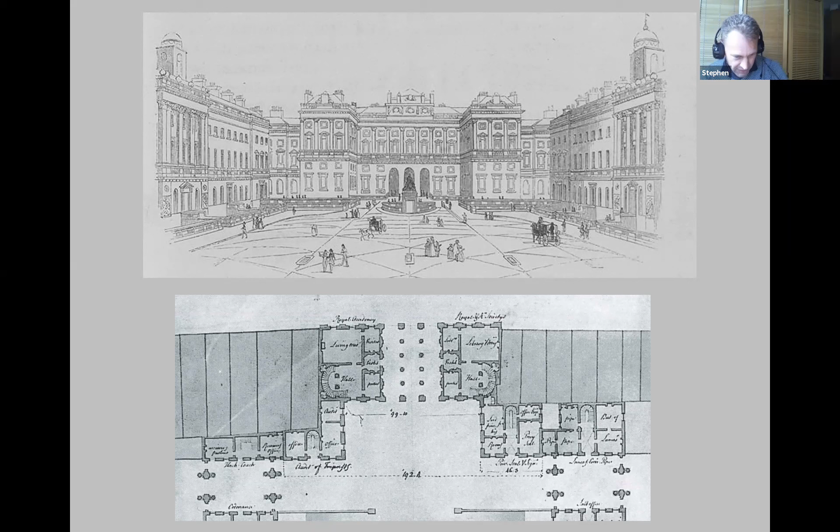The Strand block was designed to house nine institutions, but it was also designed to separate them. So perhaps it would be more accurate to say it took the form of an assemblage of disconnected suites of rooms.

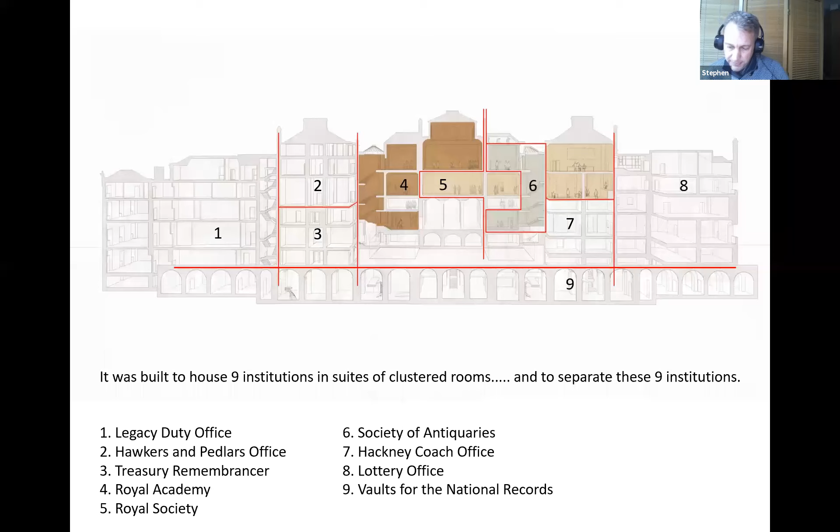The Courtauld is a unique institution, half academic teaching in art history and conservation of artwork, and half art gallery. It moved into the Strand block after refurbishing it in 1989. You can see how the Courtauld appropriated Chambers' divided palace to house a largely divided set of departments. The poor linkages, contorted corridors, and almost 50 changes in level that existed between the old suites of rooms meant the visitors' and students' experiences were often confused and disjointed.

At its simplest, our project has focused on creating a circuit for shared exchanges, linking together the suites of rooms so that all of the activities and the collections at the Courtauld can be encountered by students, staff, and visitors. This approach tunes the rooms for the current activities they accommodate, but it also leaves them open to be reused for different activities in the future.

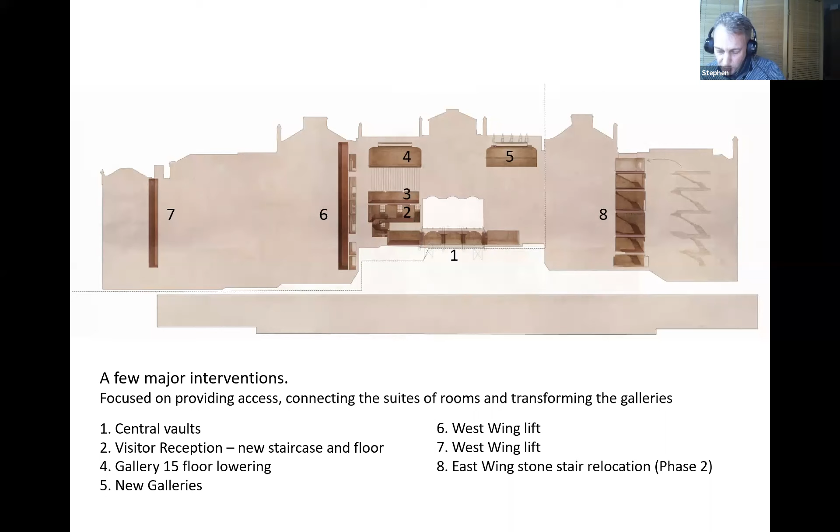Bridging, tunneling, connecting, and new lifts as well require making a few major interventions, but thousands of small adjustments. Everything is an intervention and everything is a one-off because the building is complex. It's riddled with inconsistencies following piecemeal adjustments over the last 240 years.

The material we're working with remained concealed for much of the project. Our work has previously been described as gentle surgery, but this requires the deployment of the full range of interventions in the body: open heart surgery, keyhole surgery, and acupuncture, as you'll see.

So what follows is the archaeology of a construction project. The various finds could quite possibly be reclassified and reordered. I noticed they don't match any of the craft disciplines defined on the London Craft Week website, but I hope you will feel how craft emerges from the conditions encountered and recorded below.

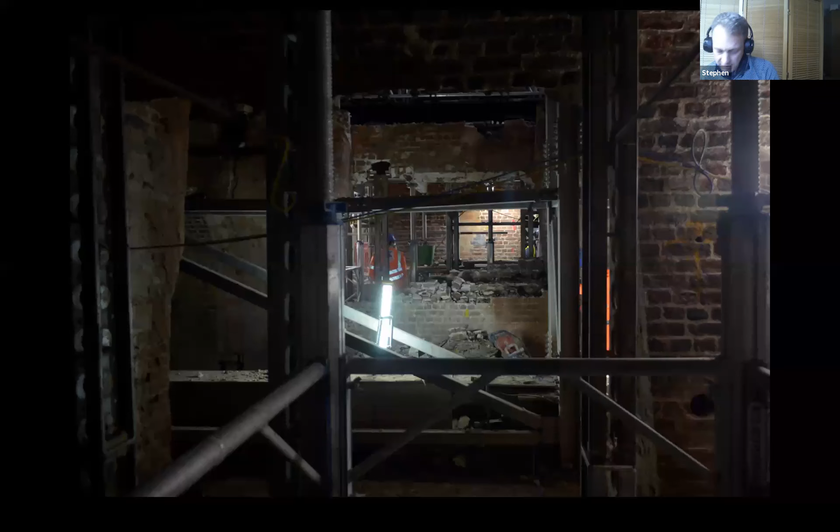The emergence of the openings, connecting through those, starting to link the east and west sides of the building. And you get a sense of the extraordinary scale of intervention in order to remove some of the heaviest and thickest parts of the fabric to create that tunnel below the vestibule.

You can just see the score marks on the brick where they used a diamond tipped cheese wire to cut out some of the thickest areas of brickwork.

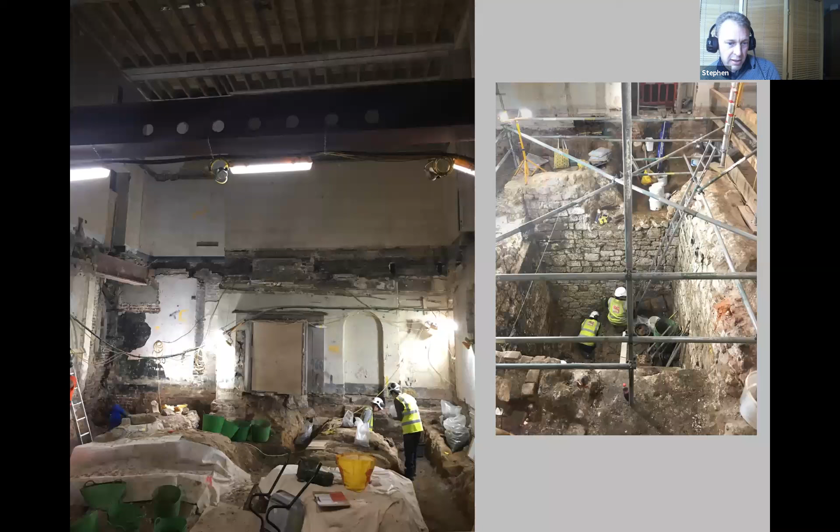We also had to lower important floor areas in order to get level access through some of those lower levels. And you can see on the right the kind of things you'd never know were going to appear - that's a medieval latrine which emerged partway through the construction, of which the archaeologists did their work and recorded their finds.

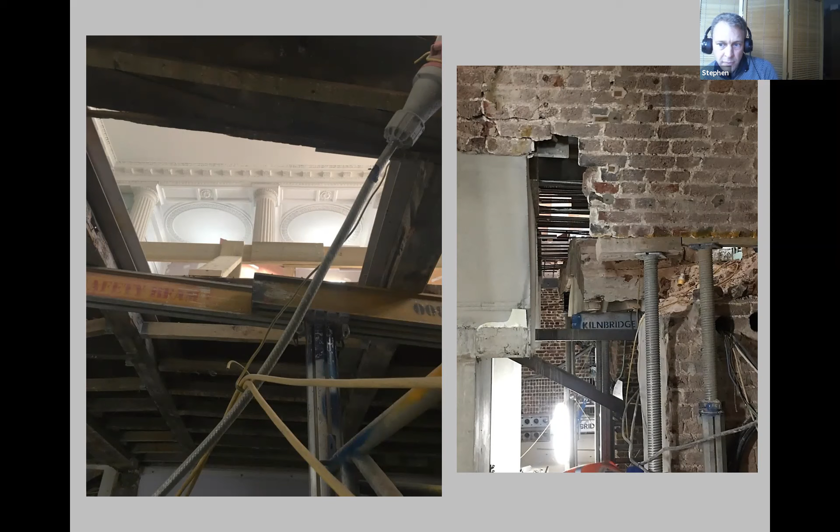On the left, you can see when we took out the central section of the vault in the vestibule. We also had to construct a temporary road bridge so that vehicles could get into and out of the Somerset House courtyard to keep servicing events. So all of those movements, the vehicles were going on while the workmen were underneath, continuing to excavate.

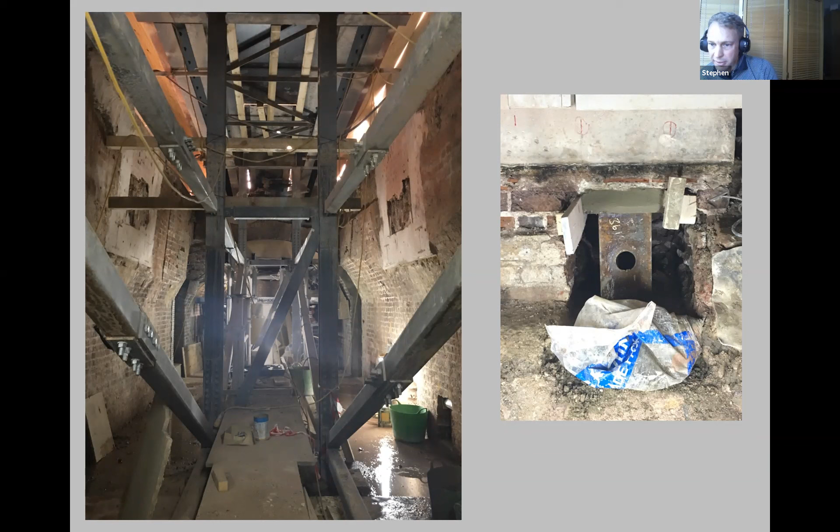You can see here the existing brick vaults to the east and west of that central vault were retained and trimmed back, and then we cast the new central vault in concrete, which we'll look at later, into that existing brickwork. And these are the props holding that brickwork up.

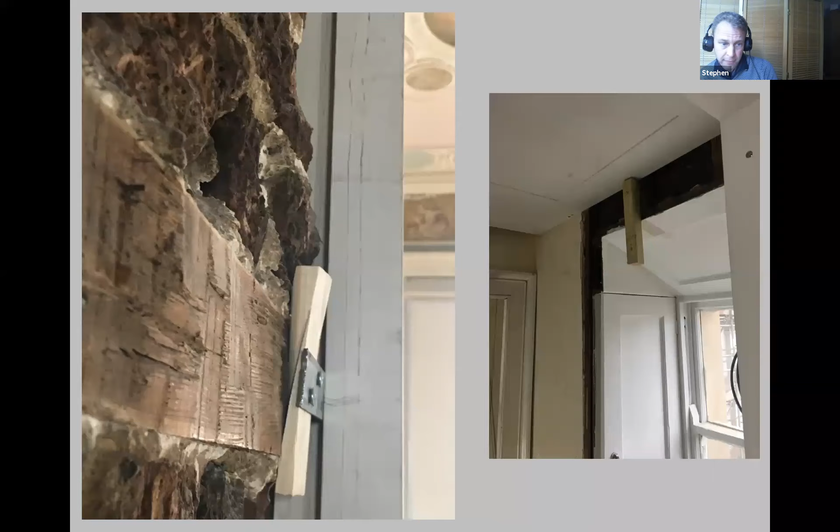Enormous props and modest props. Improvised props.

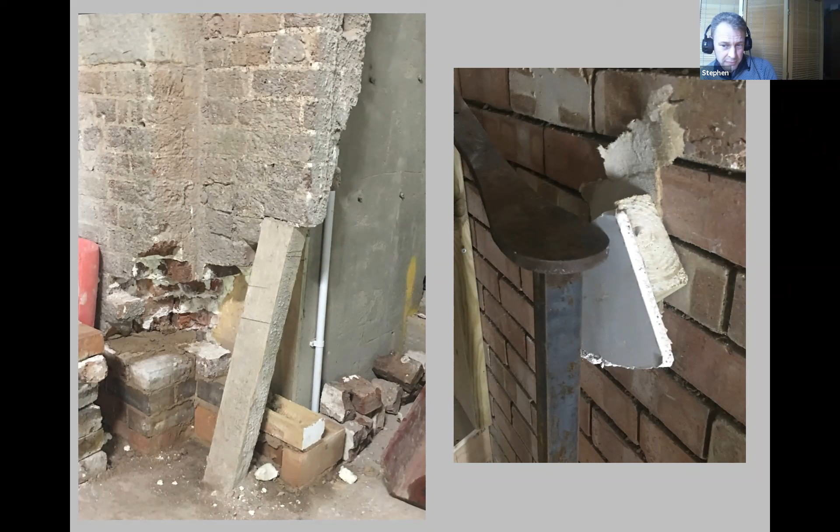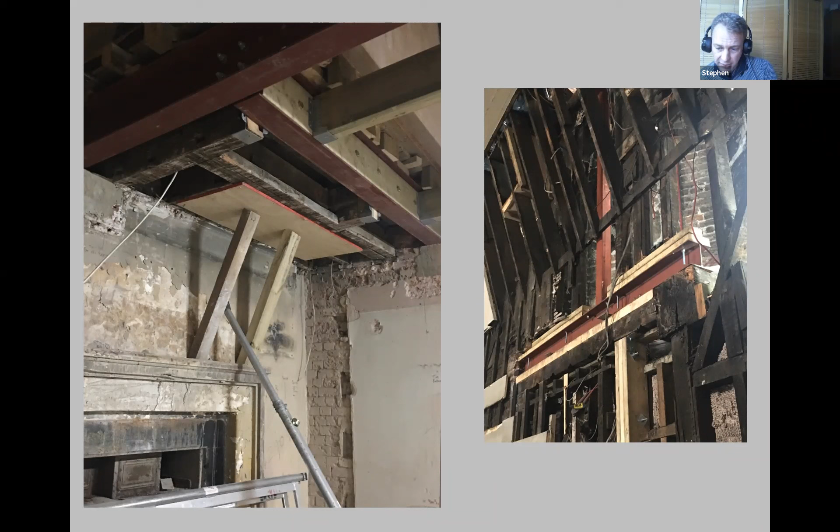One of the extraordinary things about working in this way, intervening in a building of this kind, is just the incredible sense of gravity and weight that you experience.

Propping to replace timbers that have rotted over time, and propping to hold up walls when you've lowered floors.

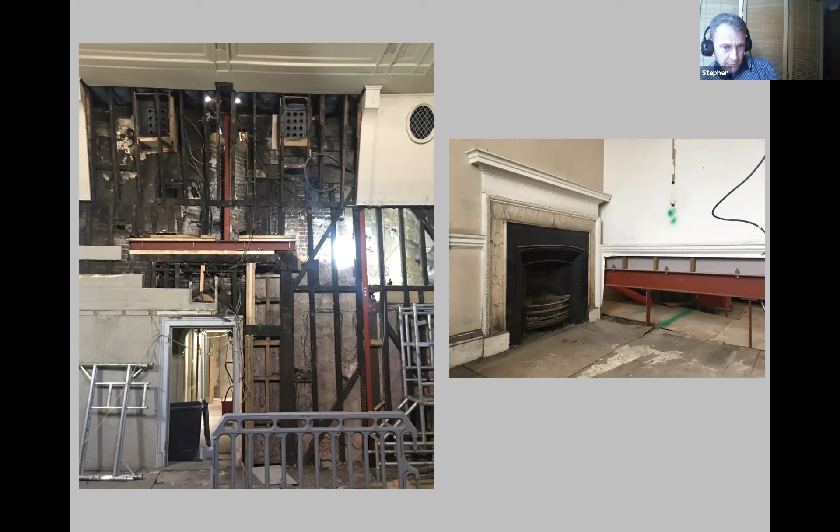We also propped the walls at high level where we removed the old cellular attic rooms. This was, in a way, to take the place of what the old floor beams used to do in both holding the walls together and preventing them from falling in. This was an essential part of creating the new galleries on the second floor, which bridge across to the east staircase.

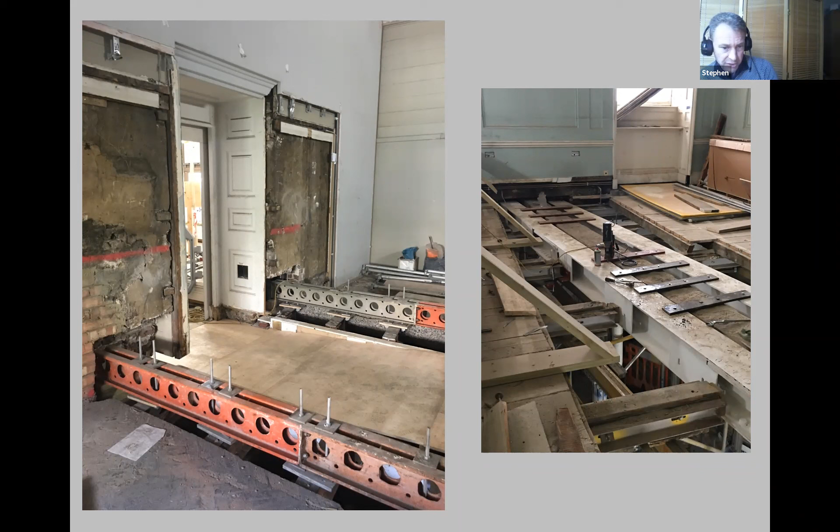Propping floors while you cut sections away to introduce level access and ramps. And propping old timbers so that you can strengthen floors to prevent vibration from the strand and the gradual destruction of the old stone floors.

And this extraordinary find, which we encountered in the fine rooms at first floor, spans across the fine rooms. It's this huge roof truss, which is to put as little load as possible onto the vestibule and spread the load from above onto the two side walls.

You can see on this section, in the middle of that drawing, the three arches of the vestibule, the road that goes through. Below that, the very dark section where we took out the vault.

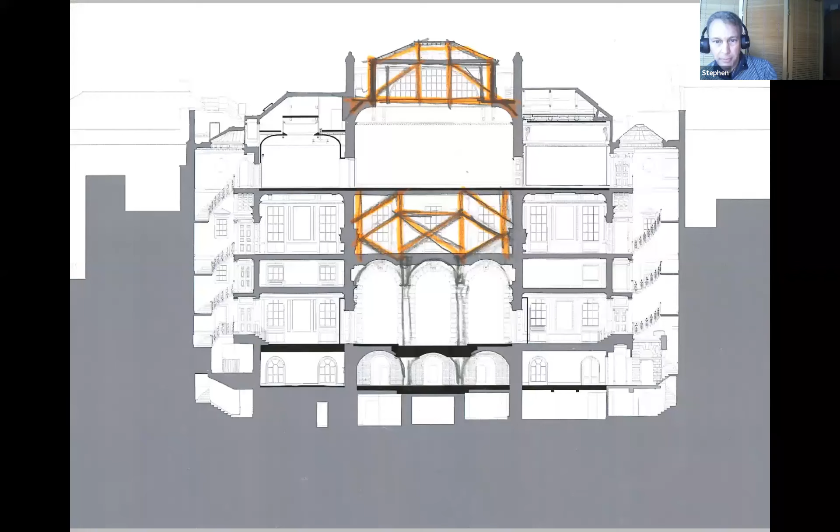Cutting. There was a lot of cutting, slicing through brick walls to make new openings, cutting out old steels, cutting through timbers.

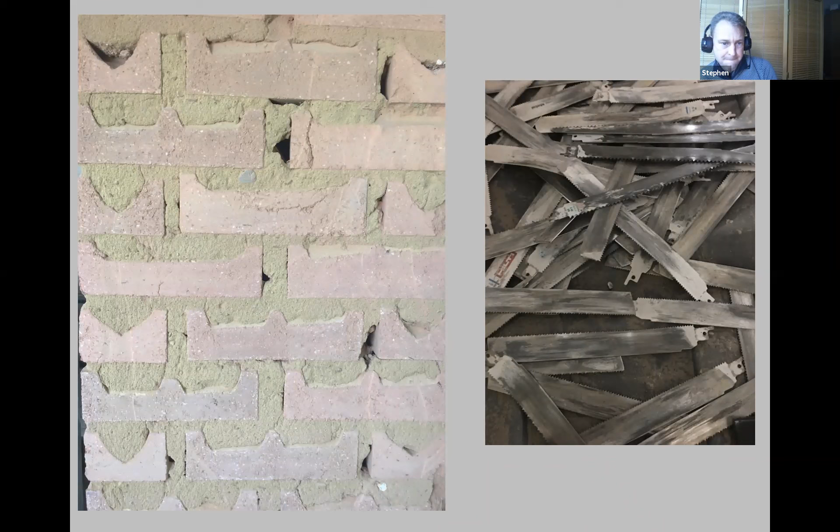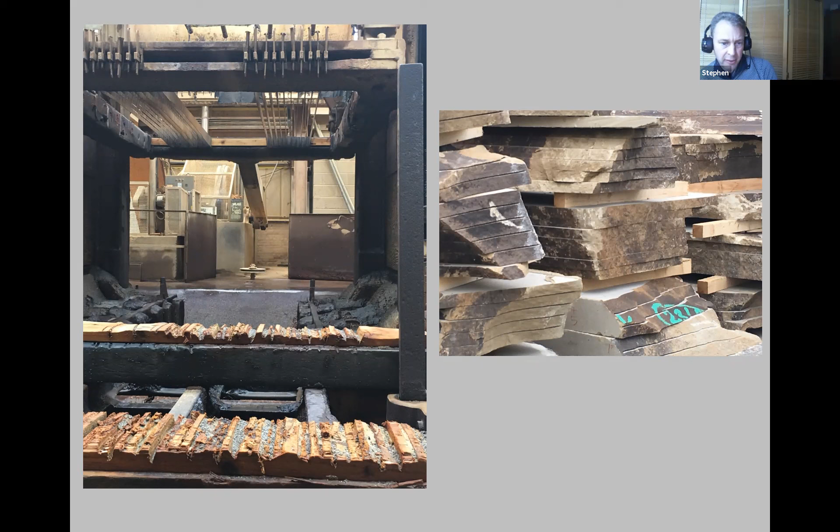Cutting all the new York stone to form new areas of floor for the public areas. And as we saw a little earlier, cutting through the huge masonry structures that support the central section of the building.

And then the incremental cutting through, one step at a time, the side walls with the maximum load comes down to piece in the new steelwork and concrete to support that central section and connect through the vaults.

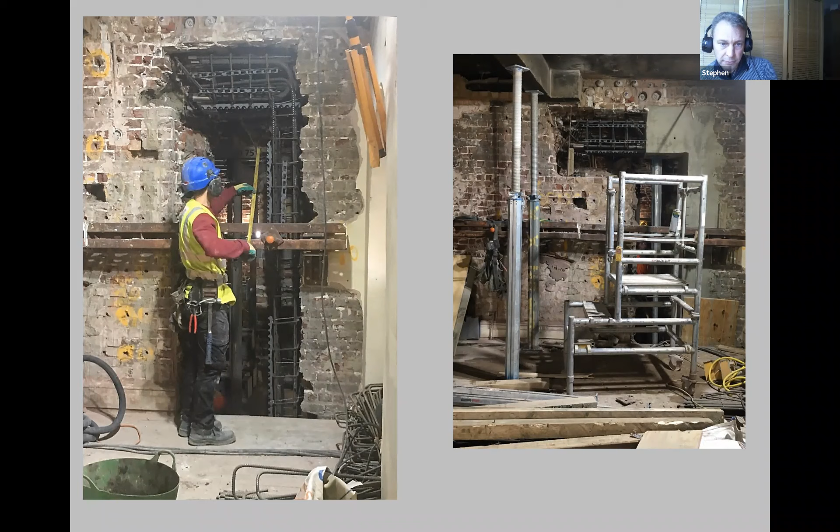A new opening we cut through the great room into what become the new galleries to the east stair.

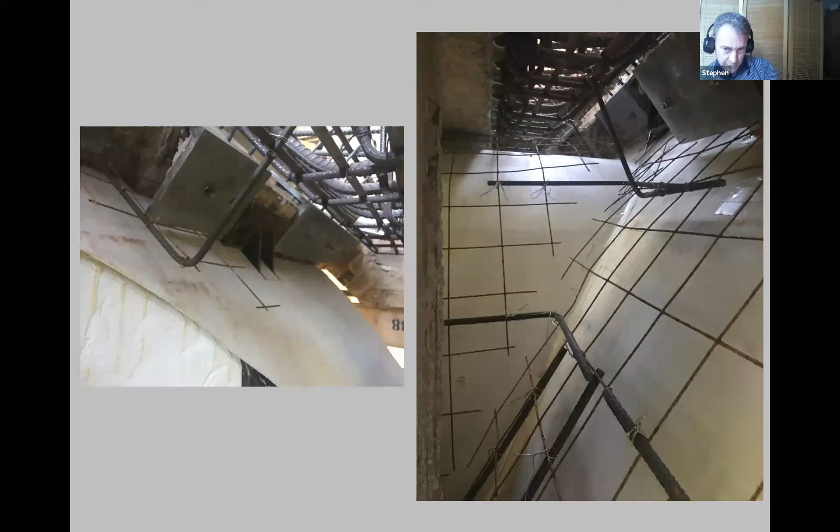It's an extraordinary skill, making each form to suit the template of the bricks that were retained on those brick vaults either side to the east and west.

And what this enabled us to do was to lift the height of the central vault so that we could get access right the way through the underneath of the building.

And you get this beautiful echo from these vaults, which we designed to connect into the existing cross vaults of Chambers's brickwork. And you can see that echoed in the plaster vaults of the vestibule outside. So it's interesting how, in the end, we found these connections between the heavy masonry and the lighter plaster work that gets introduced as you move up through the building.

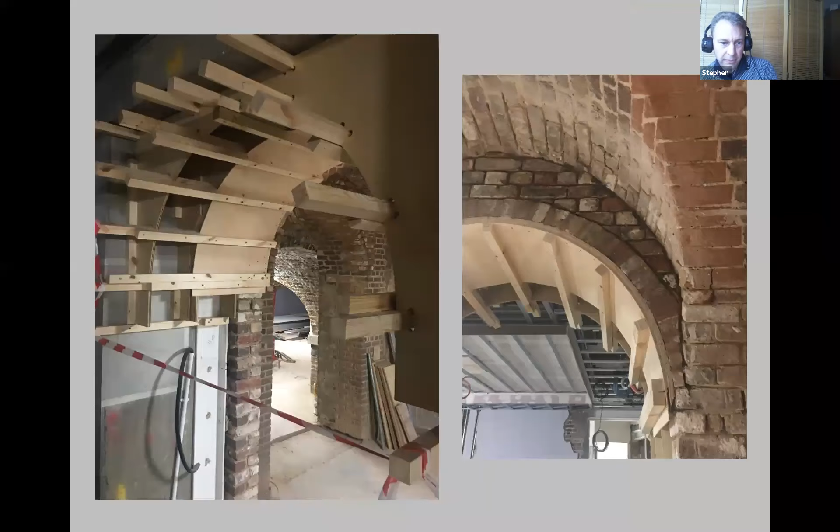Formers for new brick arches to connect into those vaults.

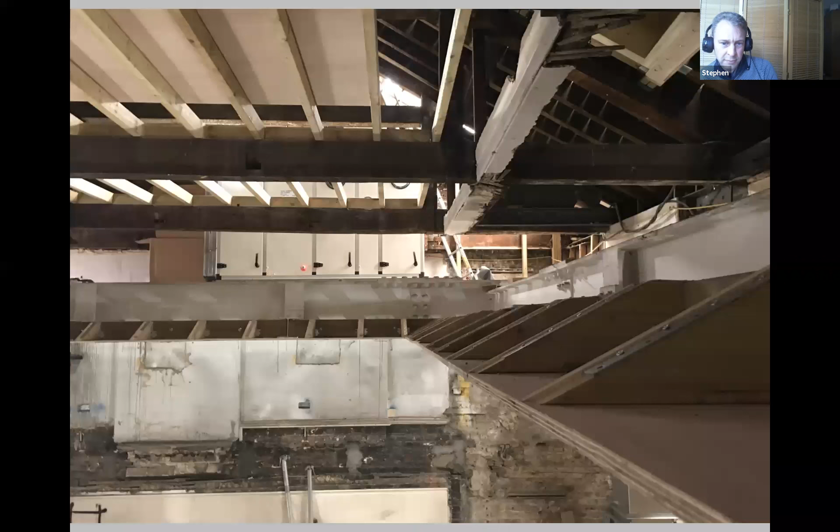And the formation of edges to create the openings in the new second floor galleries so that we could introduce some natural light from the roof into those spaces, and echo in a simplified way the way Chambers uses light in the lanterns of the great room.

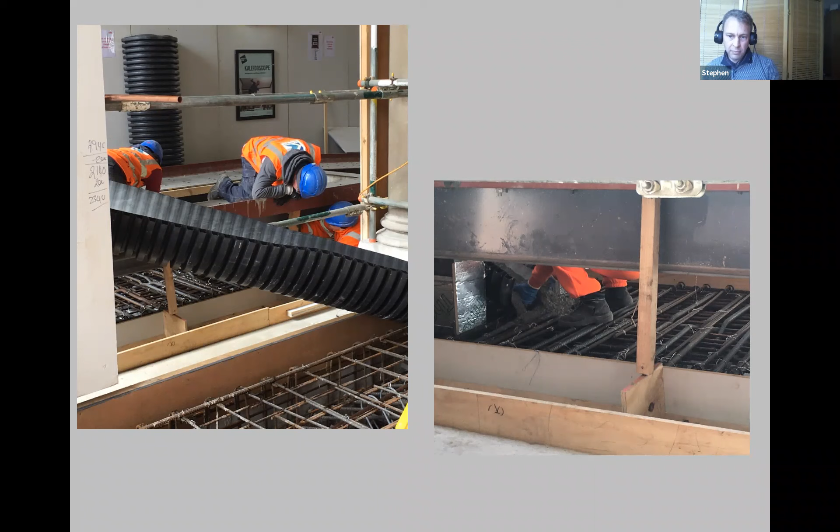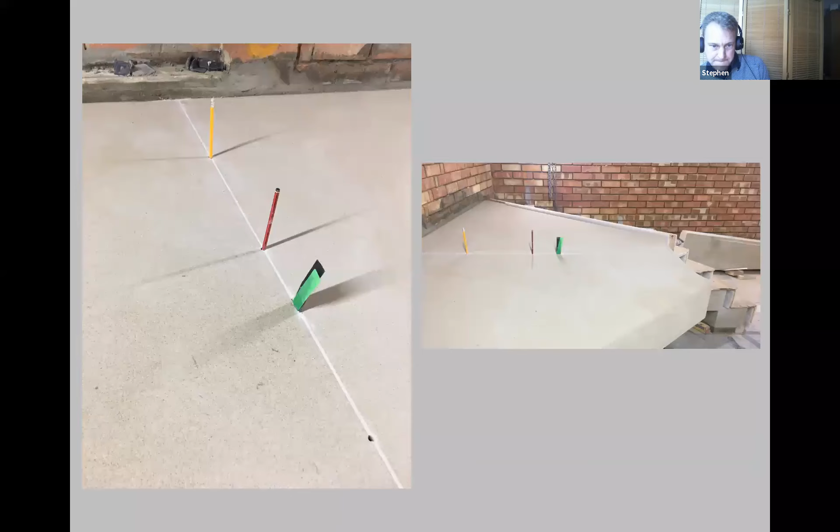This was a rather beautiful encounter one Friday evening after walking around site, and I didn't understand why these small holes had been filled with pencils and paper. This is part of a new cantilevered stone staircase that we were constructing. And this was the answer.

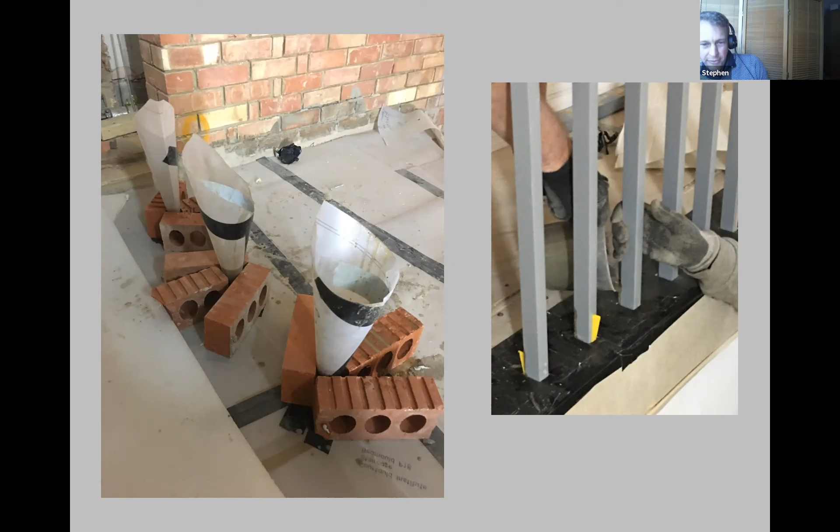On the right, a sort of similar but different process for anchoring the new steel balustrade into the edge of the stonework for the staircase. So this incredible combination of improvisation and precision.

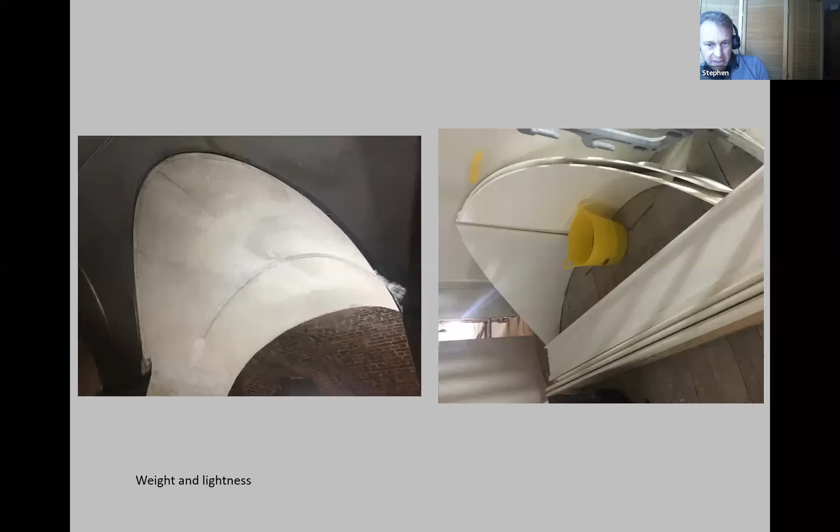This was the beginnings of the tread upon tread cantilevered construction for the new visitor staircase. So it's built into the brick wall directly. Each stone bearing on the other to take its load, so there's no beams or supports underneath.

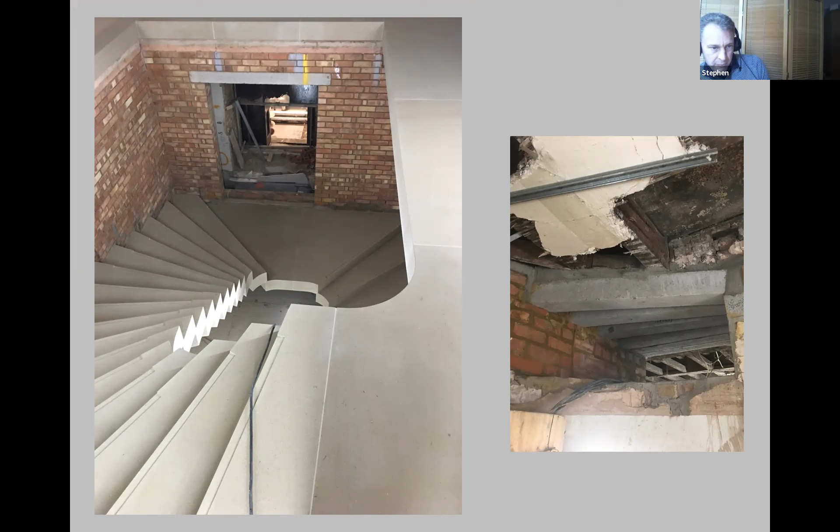The embedment of those new vaults into the existing vaults. And that's not some form of cladding, that concrete is holding up the entire building.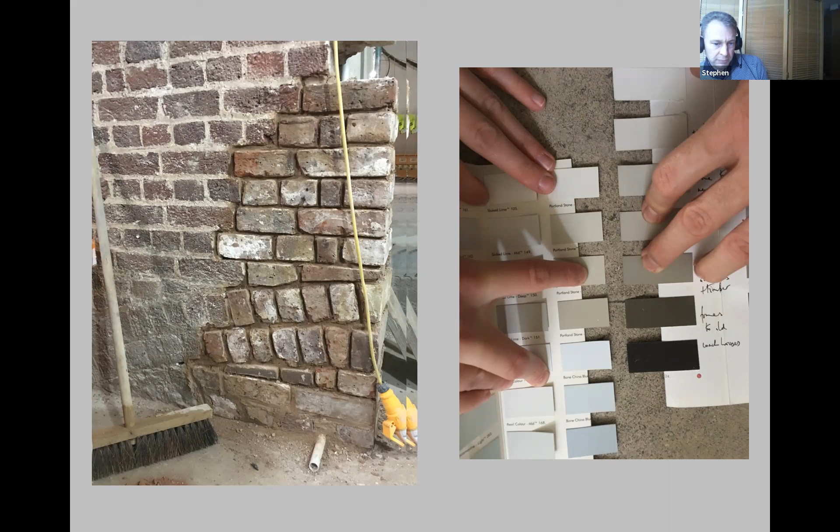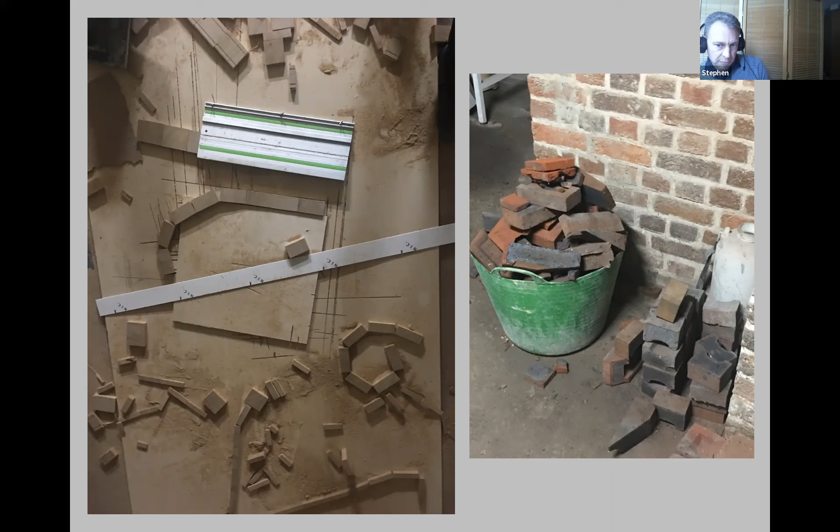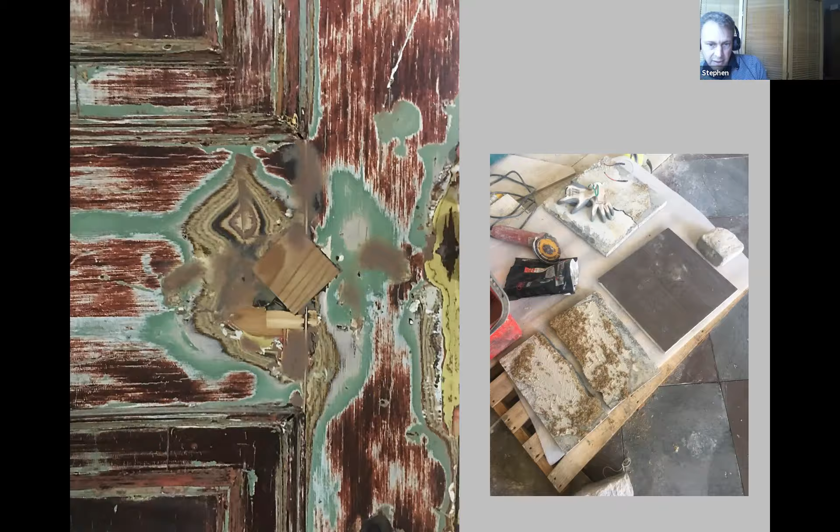On the right was the beginning of connecting the new and old stones in the vestibule so that we could achieve a step-free access in that area. Piecing in areas of floor, piecing in areas of plasterwork.

Piecing in new York stone floors to remaining historic floors. Piecing in new areas of plaster ceilings into the lath and plaster ones, where we've had to introduce strengthening or support for new fixtures and fittings.

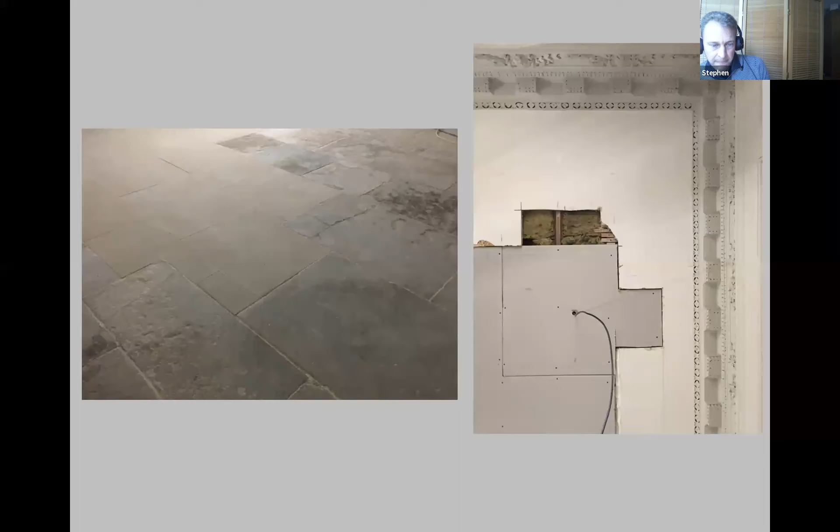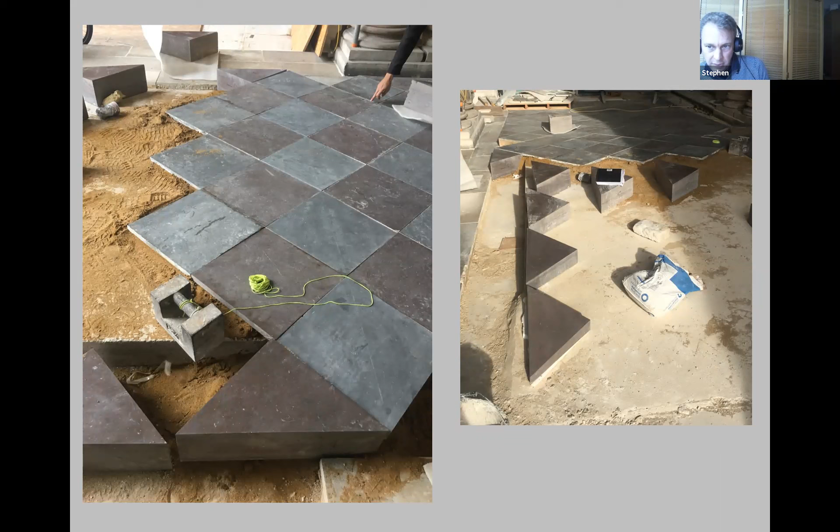Piecing in existing and reclaimed floor material, where we've had to alter levels to get level access through. And that's the vestibule stone, where we've got two gentle ramps to the east and west.

So the side aisles, east and west of the central vault, which we've removed and poured in concrete, reusing all of the old stones and then adding in the new edge stones, these solid pieces of Swedish limestone from the quarry that the original stones came from a couple of 100 years ago.

Figuring out the actual grain of the stone, making sure it was cut along the bed and not across the bed. In the past, some of those stones have been cut the wrong way and they're now more fragile.

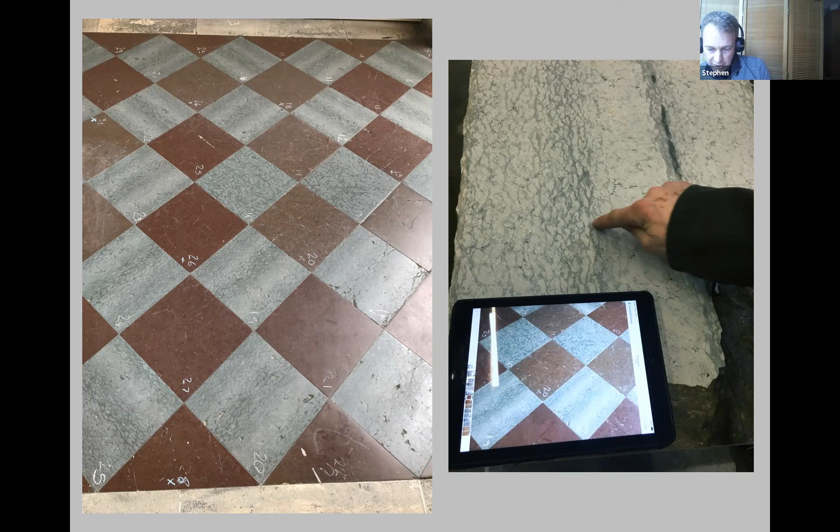Everything's numbered, carefully taken up, stored, and then once the works have gone on below, they can be relaid. And just agreeing the areas of that stone that were suitable to match the existing stones and those which were not.

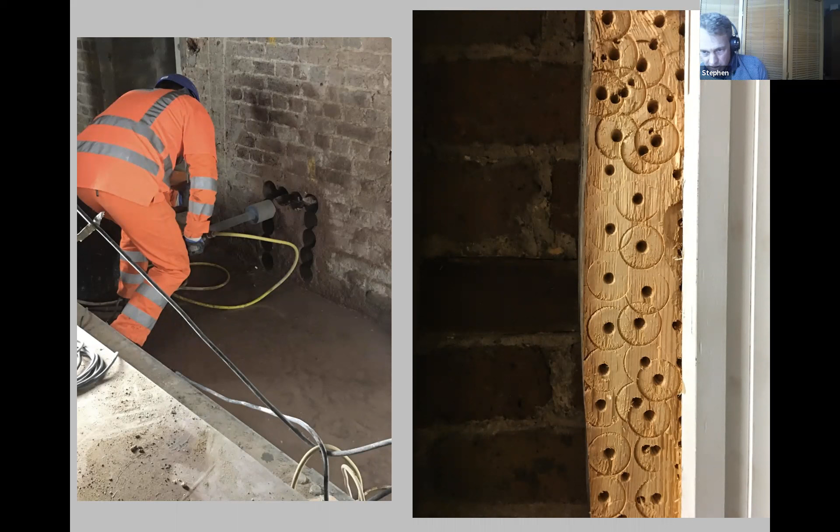Both at the large scale and the small scale, that was the removal of some timber on the right in order to fit the new doors into the old openings.

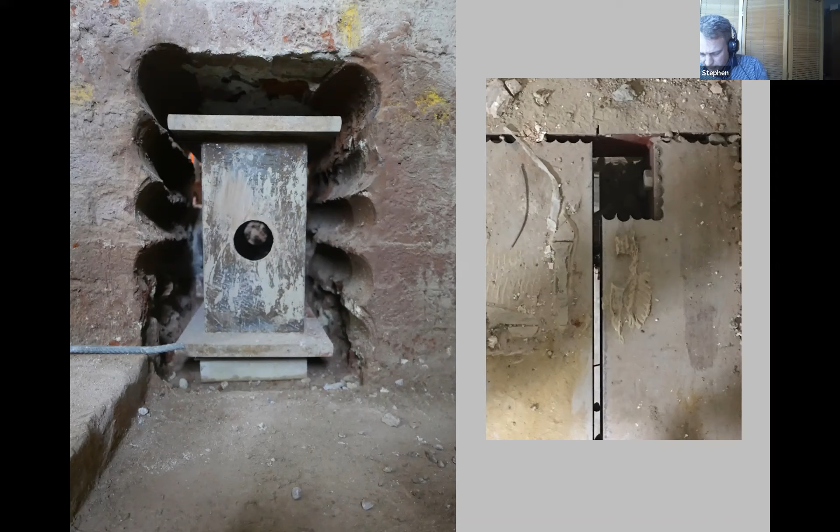Coring out and testing the York stone to receive the new metal handrails.

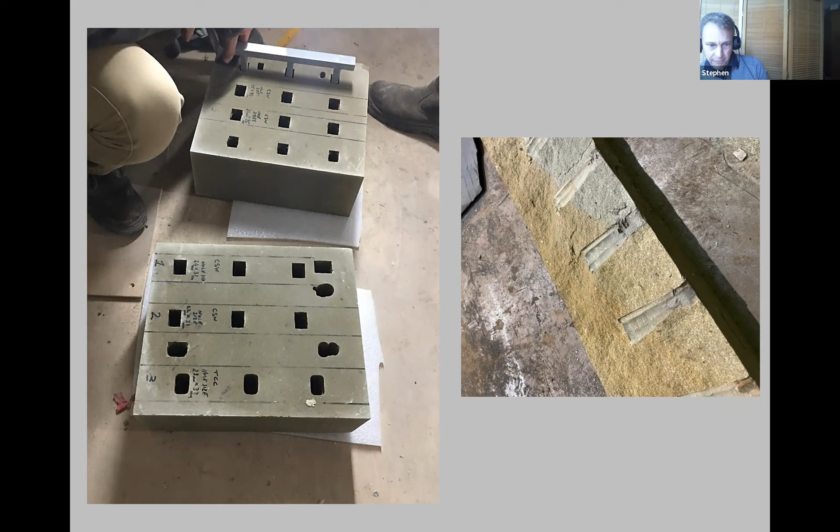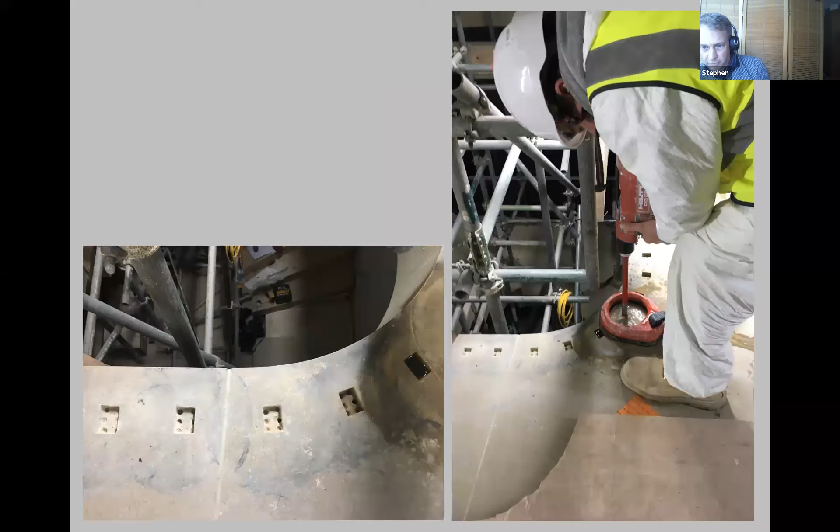Taking out timber to receive new locks and security. Working the stone. That's the coring out of each of the notches to receive that metal balustrade.

Threading through, there was a lot of that, mostly services. This was a project which involved completely rewiring and reservicing the whole building. New security, state of the art cameras, means of escape, automatic opening doors, assisted doors for access.

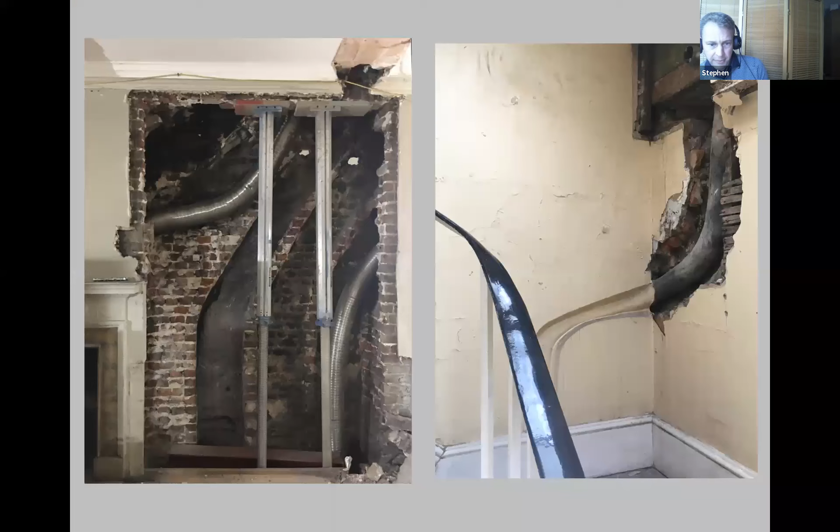And this is the thing you'll never see, which was incredibly beautifully put in extremely tight locations. You can see here on the left, the old flues through the chimneys, which had been used to put ducts up historically. Old lead pipes in walls, in rainwater.

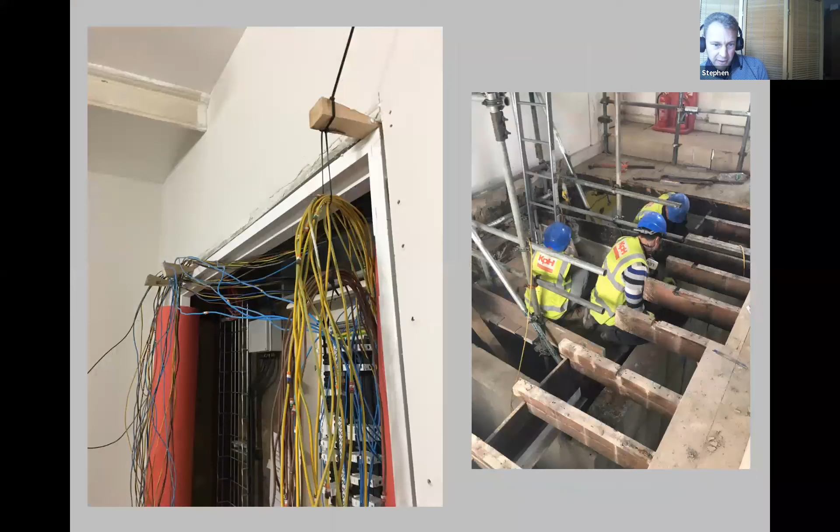All kinds of voids and services threaded through this body. Millions of meters of new cabling. And on the right, threading a new lift through 6 floors in the west wing to provide access to all of those conservation studios.

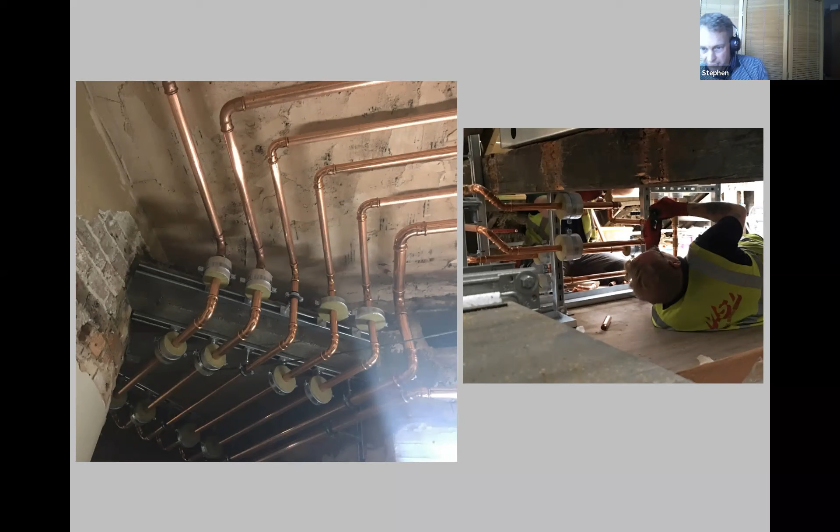All the pipework in the ceilings and the plant rooms in the roofs. There was no generosity for any of those things, and everything we could gain for the spaces below was hard won.

Threading huge new ducts to move air around the galleries, and cables through historic ceilings for new lighting and smoke detection.

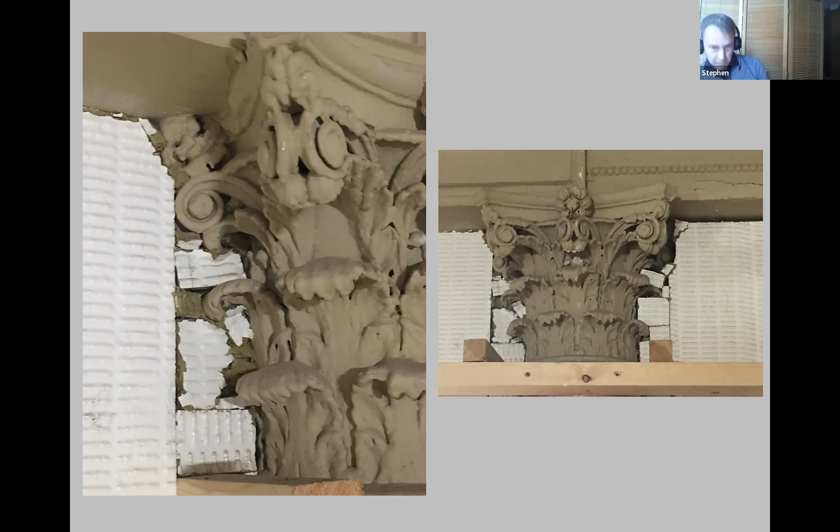Approximations. These are some of our own testing mock-ups for cornice dimensions and lining heights to rooms that were going to become small galleries.

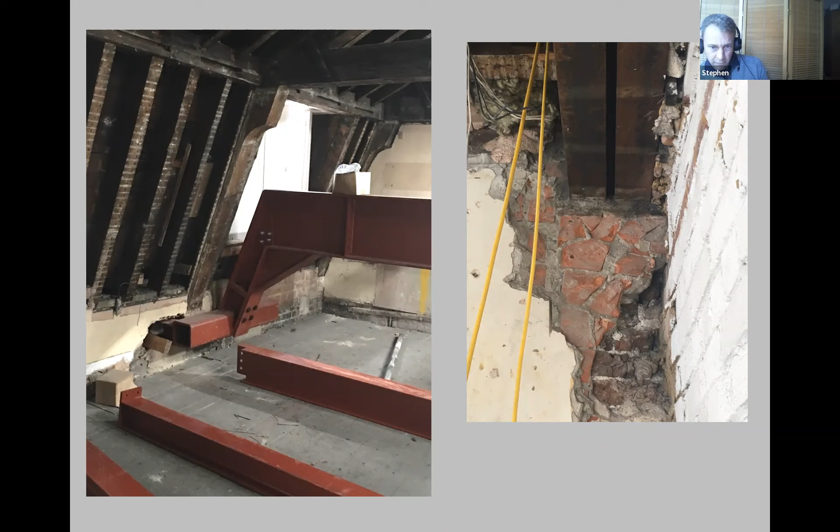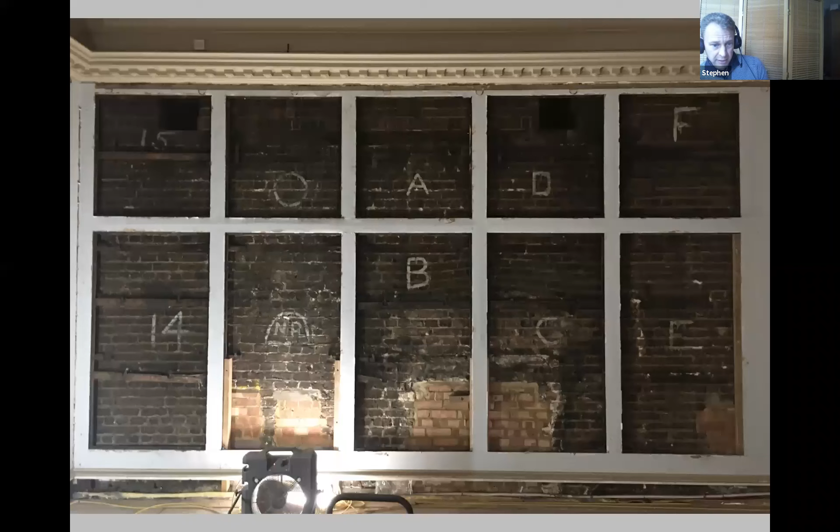Lining. There were some extraordinary revelations when we worked through the linings of this building. You can see here in the anteroom to the great room chambers, original paneling, and the brickwork dividing the 2 galleries behind.

And in some of the galleries, you could see a whole archaeology of paneling: the original gallery paneling from Chambers, paneling that had been then installed across the face of that when the Courtauld moved in the late 1980s, and then newer paneling which had been installed in the last 10 or 12 years for the new gallery walls.

Paneling around old fireplaces. And you can see our work's also involved in entombing some of those fireplaces in location and the tight tolerances around that, so we could maximize the dimensions we'd have for the galleries. So this is the stud work, which then gets lined over.

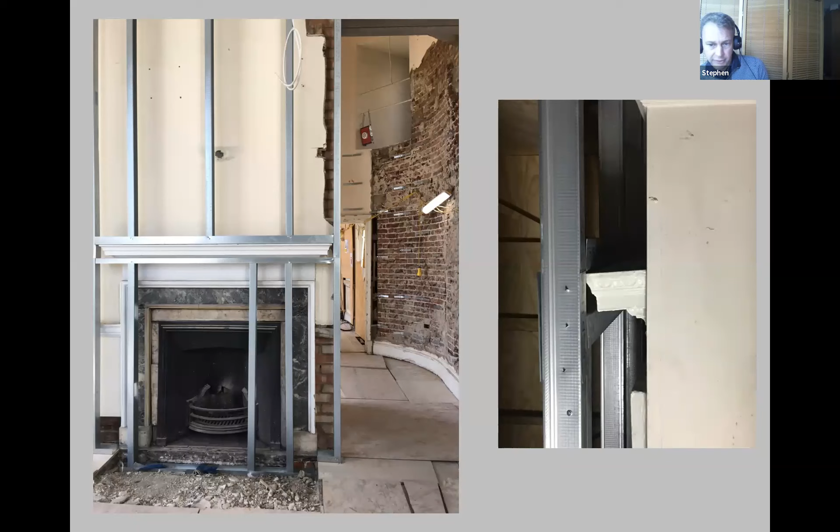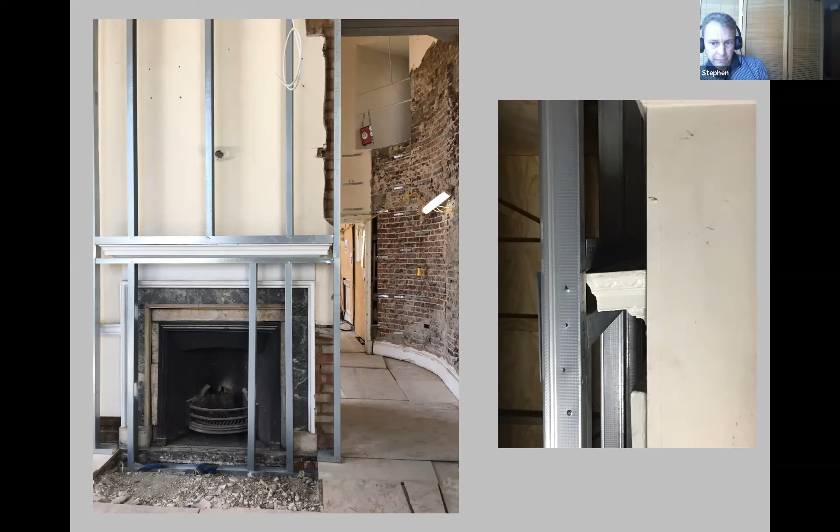New linings to the great room. You can see so that the new paneling and the cornices read as one.

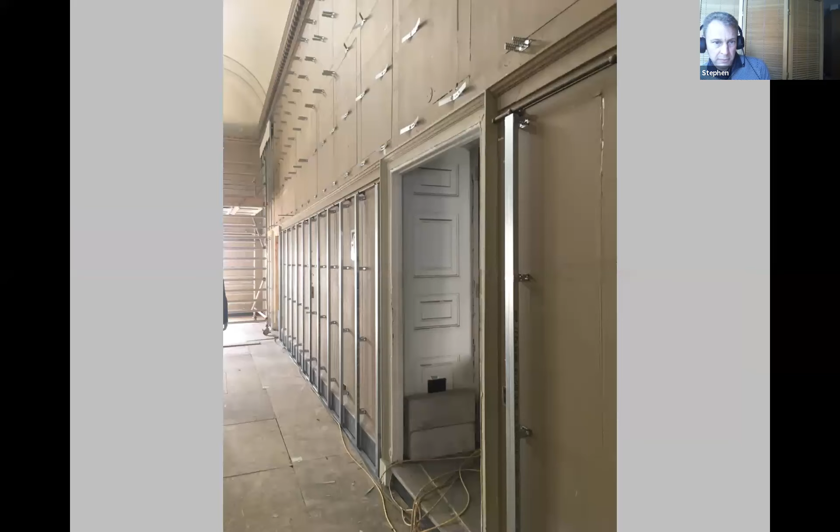That's it. And then you can see on the right the fibrous plaster mold constructed, echoing the geometry of those historic ones.

Ceilings. These beautiful little cradles that were created by wiring through from above to support the historic plasterwork while repairs were carried out and new cables could be suspended through for the new lighting.

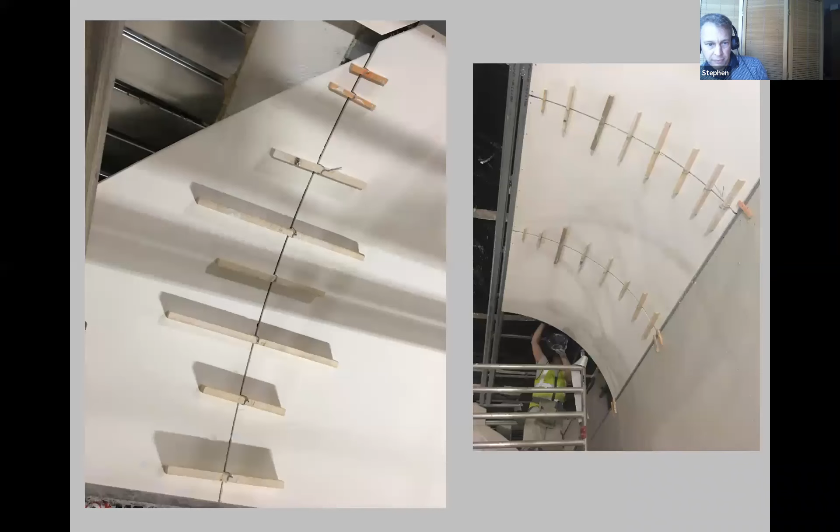This beautiful moment where the new fibrous plaster vaults were being positioned and leveled and lined through with these sticks and wires. This sort of strange combination of liquid levels, laser levels, and bits of wood and string almost.

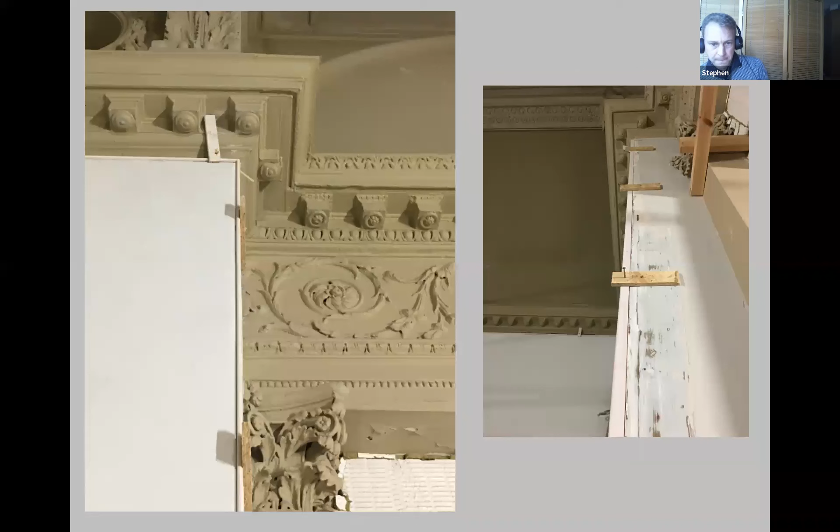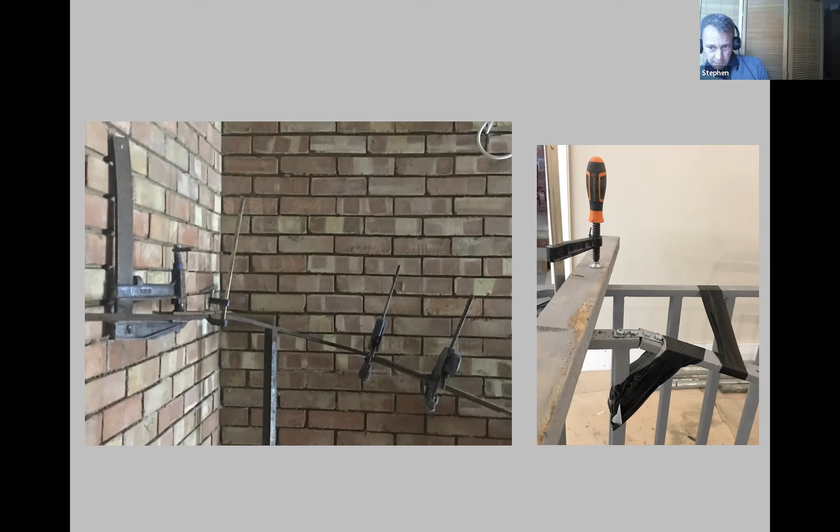Metalwork and the wreathed work taking the new handrail on that cantilevered stone staircase. Some repairs to the concrete pouring where the joints were in the formwork.

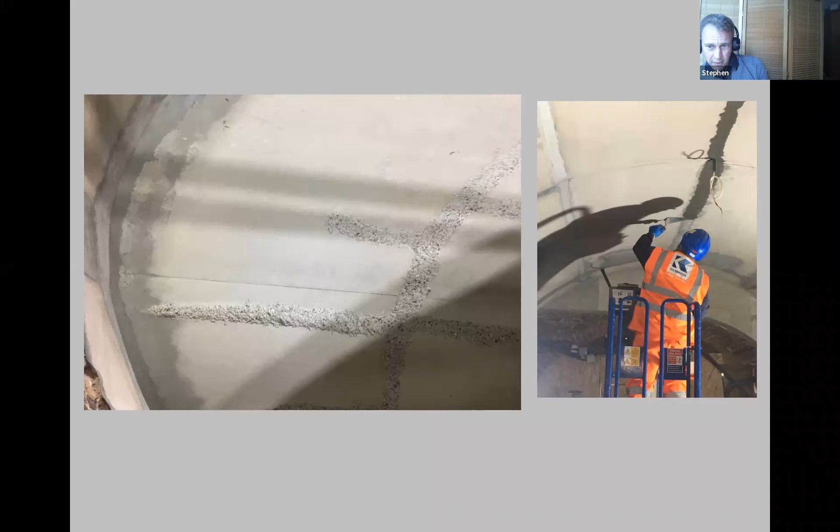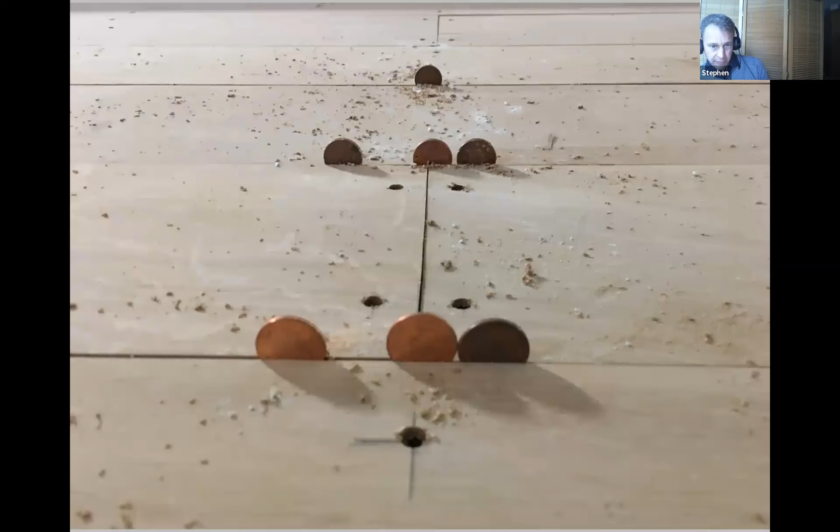Gapping. This was a really beautiful moment to encounter. These are the new oak floorboards, and we'd specified a penny gap between each board to allow for a little bit of movement and visual tolerance.

And because you couldn't buy a spacer exactly the right size, the workmen had all been asked to go home and bring in all their loose change. It's so beautiful.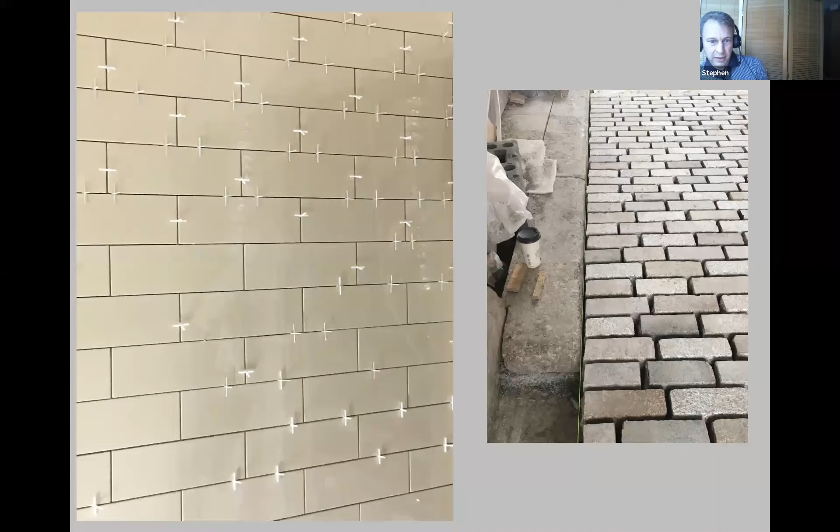New tiling in the visitor toilet area and the new setts being laid as part of the new access in the vestibule.

Tracing, coming towards the end now. The new cantilevered stone staircase on the left, and historic services in some of the floors on the right.

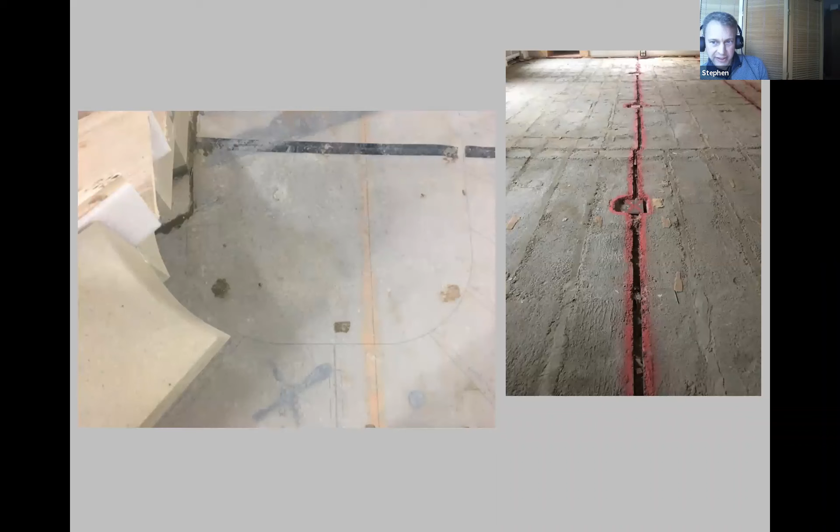There's so much care in all of the setting out that happens in a project like this. Tracings of things removed, and then templates to create new things that are going to be installed into old openings, because they're all slightly different.

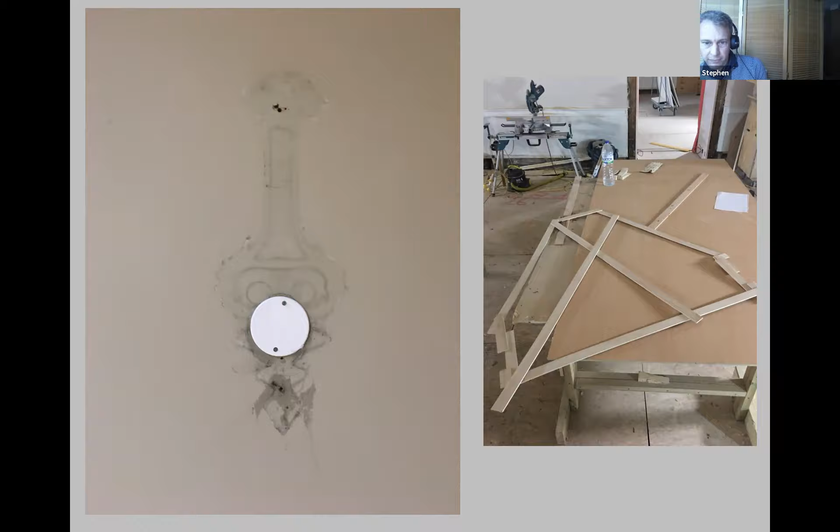Tracing of cornices and the tracing of wires to get to new lighting and new services.

And the tracing of what lies beneath the floors that you're fixing to, because we fix through the surface into the joists below, and then the tracing of cracks and fault lines in the plaster.

This was something which I really couldn't believe how it was beautiful, which is the fixings tracing those joists below, which you'll never see, but are echoed in the visible trace of the fixings on the oak.

And finally, and importantly, communicating. We encountered a lot of these kind of drawings on site, just workmen explaining to each other how different parts interfaced and came together.

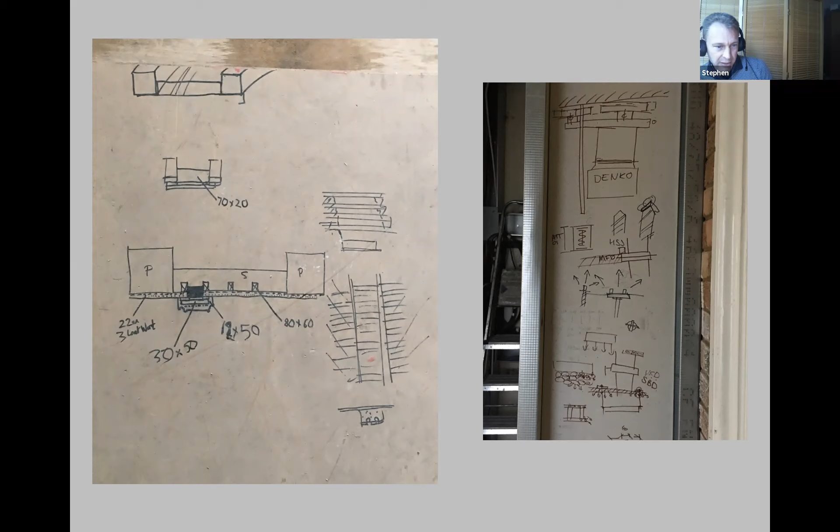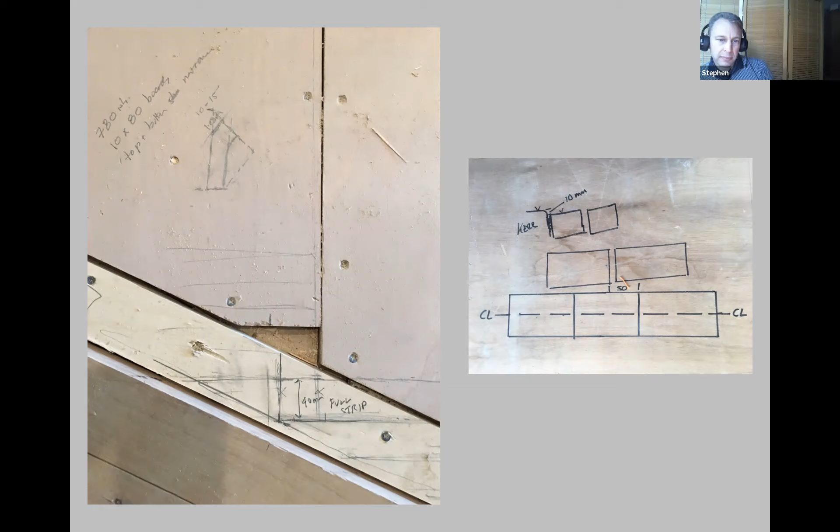Someone working out the granite sett joints and the kerbs on the right-hand side. So there's a drawing for agreeing the setting out of all those metal plates that supported the brick vaults to the east and west of the central vault, and some very clear instructions drawn on those to get them out of the way so they didn't end up protruding through the finished concrete.

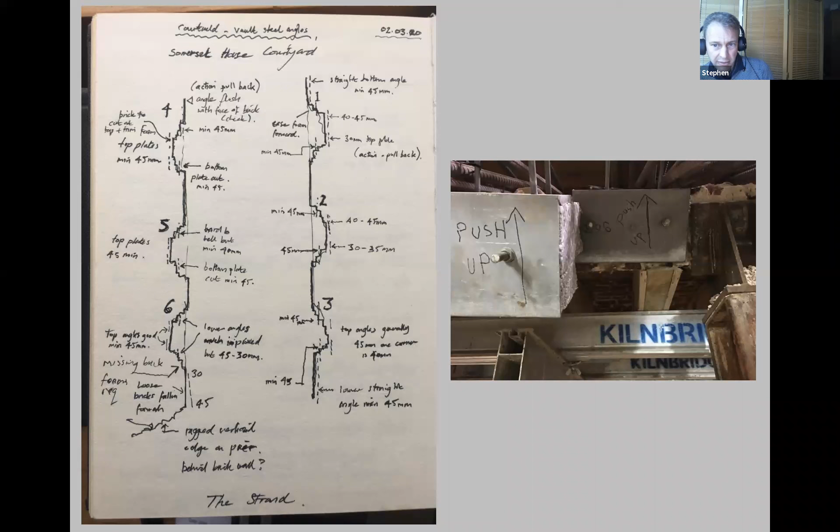Sometimes you just have to draw directly onto the material. It's the most effective and clearest way. And of course, being clear on what material goes into which void.

So in conclusion, we can say that crafted construction is the result of something far more complex than performing a series of technical tasks or fully defined instructions. It would not be possible to completely define what is required of each task, as you might if you were, say, assembling a car.

When you're intervening in an historic building, there are gaps in the collective endeavour which the craftsman steps into. And this is where the workmanship of risk takes place, because you cannot completely define the outcome before you carry out the work.

So I hope you can sense that at the intersections of the imagination, the deep knowledge of tradition, the wit of improvisation, and the body of skill and care, the conditions can be created for craft to emerge through negotiation rather than instruction.

And I think in this sense, we might think of site-based craft as a combination of anthropology, demography, and languages, those spoken and those that don't have words. Thank you.